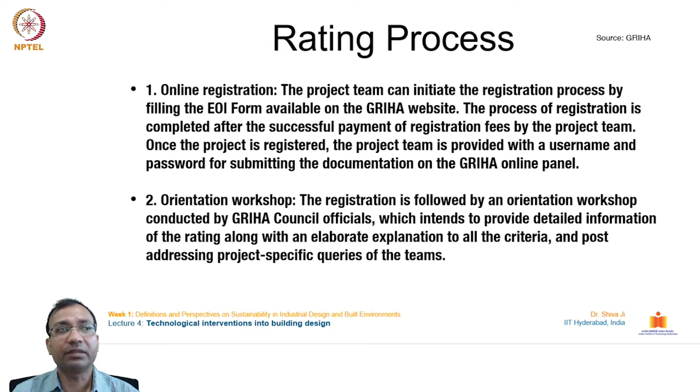After this, they carry out due diligence stage 1. The site visit shall be conducted by GRIHA Council officials to validate sustainable measures adopted during the construction phase. It is scheduled after the project has reached its plinth level. The due diligence report should be uploaded on the panel within 20 working days from the site visit, followed by an uploading of a compliance report by the project team within the next 15 working days. This is to ensure that the project abides by the mandatory requirements of the rating.

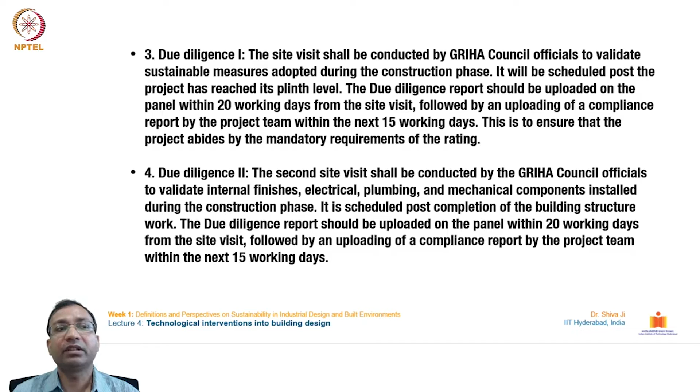Next comes due diligence 2. The second visit shall be conducted by GRIHA Council officials to validate internal finishes, electrical, plumbing, and mechanical components installed during the construction phase. It is scheduled after completion of the building structure work. The due diligence report should be uploaded on the panel within 20 working days from the site visit, followed by an uploading of a compliance report by the project team within the next 15 working days.

Further comes submission of documents. As the project nears completion, the project proponent will upload the documents for all criteria on the online panel using the username and password provided at the time of registration.

Further comes preliminary evaluation. After the online submission of documents, the preliminary evaluation is carried out by a team of professionals from GRIHA Council and external evaluators who are experts in their respective fields recognized by GRIHA Council. The documentation must be complete in every aspect of all attempted criteria, along with the commissioning report. Any attempted criteria with incomplete documentation shall not be evaluated. Online calculators provided for specific criteria need to be filled and submitted.

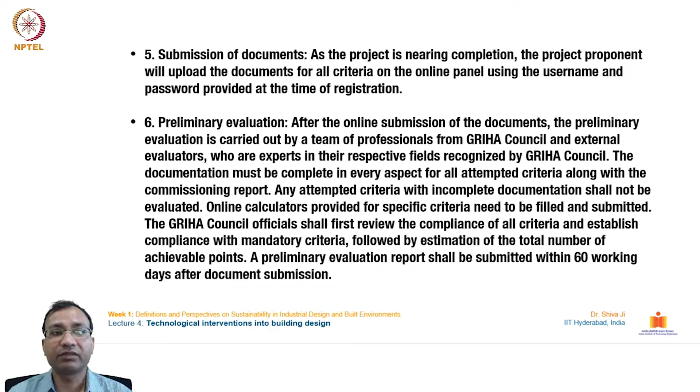The GRIHA Council officials shall first review the compliance of all criteria and establish compliance with mandatory criteria, followed by estimation of the total number of achievable points. A preliminary evaluation report shall be submitted within 60 working days after document submission.

Further comes final due diligence. The final site visit shall be conducted by GRIHA Council officials to verify the submitted documentation with on-site implementation. The visit is done once the project is complete and all equipment and systems are installed and commissioned. The due diligence report shall be uploaded on the panel within 20 working days from the site visit.

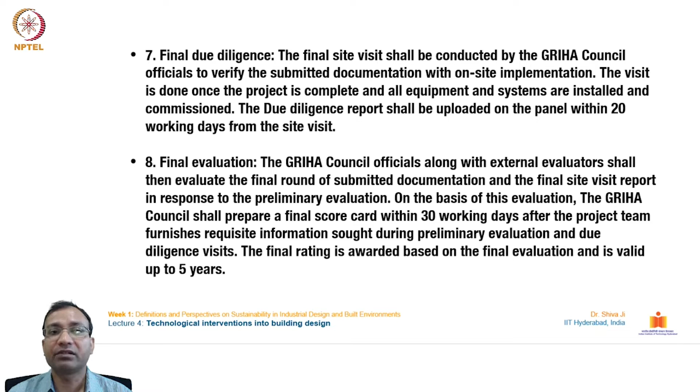The final evaluation comes last. The GRIHA Council officials, along with external evaluators, shall then evaluate the final round of submitted documentation and the final site visit report in response to the preliminary evaluation. On the basis of this evaluation, the GRIHA Council shall prepare a final scorecard within 30 working days after the project team furnishes requisite information sought during preliminary evaluation and due diligence visits. The final rating is awarded based on the final evaluation and is valid up to 5 years.

Further comes additional due diligence - green awareness drive. The GRIHA Council conducts an additional due diligence visit after the final rating for green awareness and education among project occupants. This visit aims to impart basic knowledge and understanding on green buildings and their way of working. This awareness program could be organized within 12 months of occupancy of the project.

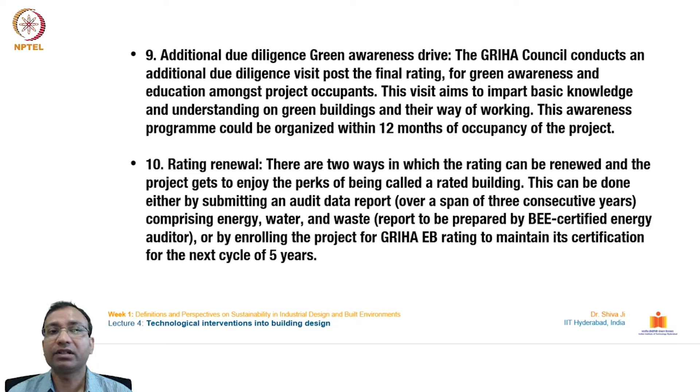Then comes rating renewal. There are two ways in which the rating can be renewed, and the project gets to enjoy the perks of being called a rated building. This can be done either by submitting an audit data report over a span of 3 consecutive years, comprising energy, water, and waste reports prepared by a BEE-certified energy auditor, or by enrolling the project for GRIHA EB rating to maintain its certification for the next cycle of 5 years.

So we currently have the green rating structure of GRIHA version 2019. The overall sequence of criteria and their appraisals have been changed in GRIHA version 2019 from the previous editions.

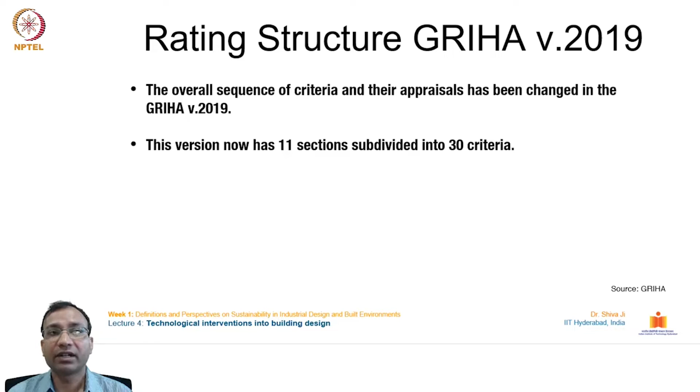This version now has 11 sections subdivided into 30 criteria. We will see them one by one. This is actually the entire criteria set of GRIHA present structure version 2019, including this page.

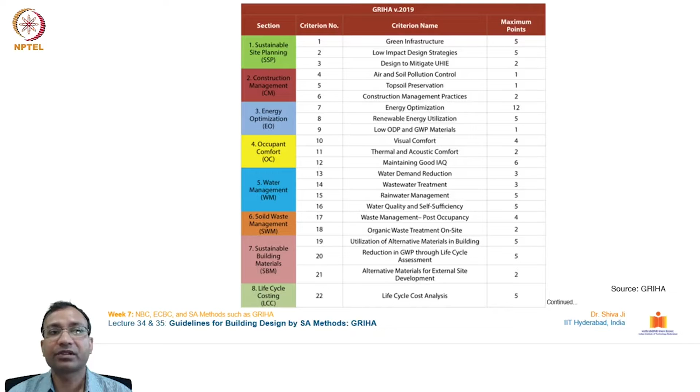It has sections, then criteria numbers, then criteria name, and then the maximum points allocated to that particular criteria. It starts from sustainable site planning, then construction management, then energy optimization, then occupant comfort, water management, solid waste management, sustainable building materials, life cycle costing, socio-economic strategies, and finally performance metering and monitoring.

Further, there is one more point of innovation added to this entire criteria set, and as a total it has 105 points in totality, including 5 dedicated only for innovations.

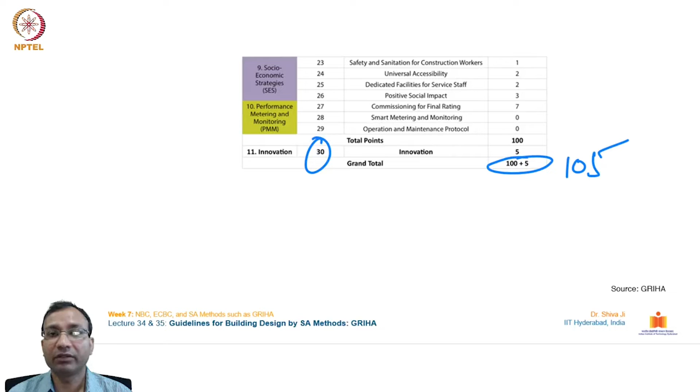So we will see the GRIHA version 2019 and its structure. Starting from this green circle, sustainable site planning has a 12% share given to this section.

Then construction management has received a 4% share. Then energy optimization has received an 18% share. This is the largest share held by the energy optimization section, which clearly shows how important it is to conserve and preserve energy.

Then the rest gets attention. The next is occupant comfort, which has a 12% share. Then water management has 16%, making it the second highest share receiving section, showing the criticality of saving water.

Then we have solid waste management with a 6% share, and 12% for sustainable building materials. So there are three sections with a 12% share, and this sustainable building material section comes at the third level in terms of percentage share. Then it goes to life cycle costing with 5%.

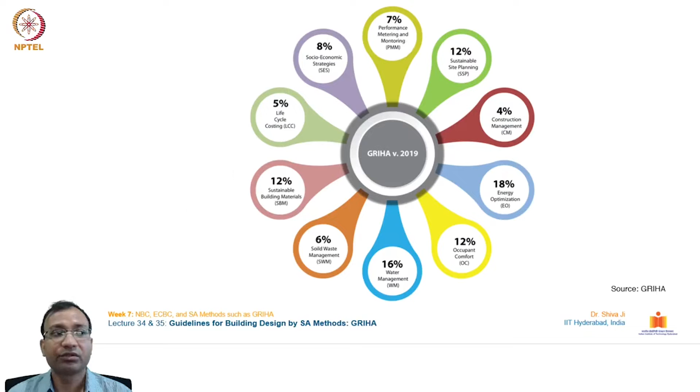Then it comes to socio-economic strategies with an 8% share, and finally performance metering and monitoring with a 7% share. We will see the breakup in the coming slides.

The percentile of awarding a star varies with the point threshold. A project which receives points within a range of 25 to 40 is rated as a single star GRIHA rating. Projects falling short of 25% may not be given any star rating. Then in the next slab, the point range between 41 to 55 receives a 2-star rating.

Then 56 to 70 is 3-star, 71 to 85 is 4-star, and 86 points and above receives a GRIHA 5-star rating, which is the highest rating currently available from GRIHA.

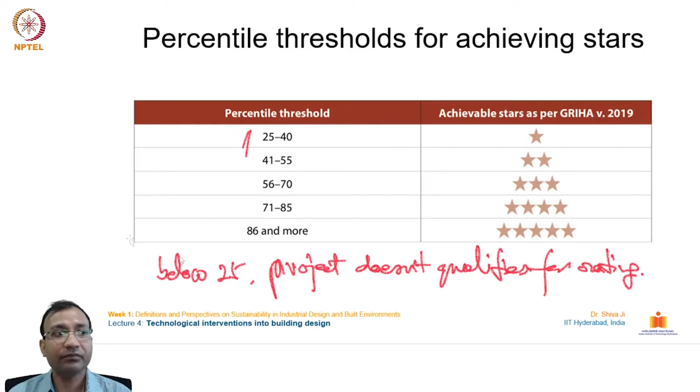Features of version 2019 GRIHA. Let's see, there are some mandatory appraisals. A project must comply with these mandatory parameters to be considered for GRIHA rating. This is very important for the project to have these criteria fulfilled and satisfied to the fullest. In GRIHA version 2019, no points are awarded to mandatory appraisals.

However, if the project fails to comply with any of them, the rating will be denied. These mandatory points do not carry any points, but they are mandatory in nature, and a project must comply with these criteria sets. Only after successfully meeting the criteria of these mandatory appraisals can the project be rated. The rest of the criteria, which are optional, have found place in the rating structure seen in the previous slides.

A non-linear point distribution system is one of the features of the present version of GRIHA. This concept of non-linear point distribution is applicable throughout this rating variant. This is done to recognize and award points based on increased efforts to meet the requirements given in the appraisals. For example, observe the point distribution for low impact design as mentioned in table 3. We will see it later.

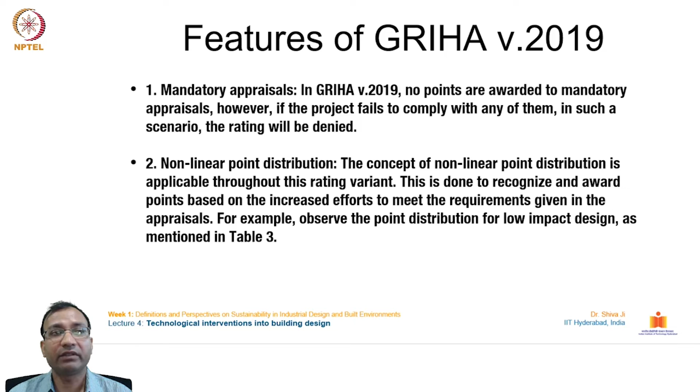Third is the addition of new criteria. The new criteria that have been added in the rating system are given below: green infrastructure is a new criteria added in this present version of GRIHA 2019, commissioning for final rating, reduction in CO2 emission of the building, alternative building materials for external site development, life cycle cost analysis, water quality and self-sufficiency, and finally positive social impact.

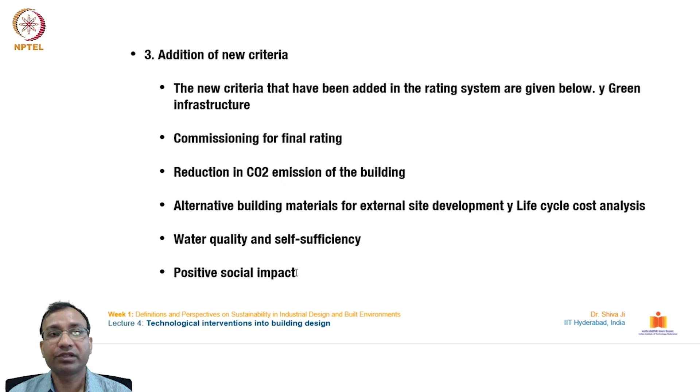So this is the classification of various buildings according to their typology. These are healthcare, hospitality, institutional, offices, residential, retail, and transit terminal types of buildings, under which there are some variations. These are the current building typologies which are rated with the help of GRIHA.

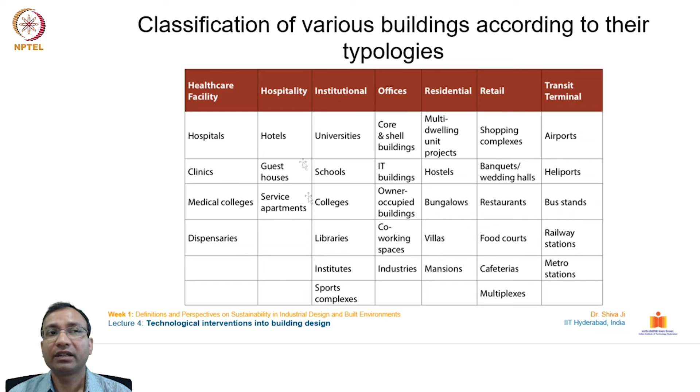In this healthcare facility, you can see hospitals, clinics, medical colleges, dispensaries fall under this typology. Hotels, guest houses, service apartments fall under hospitality typology. Universities, schools, colleges, libraries, institutes, sports complexes fall under institutional typology of the building, and similarly like these many.

So we will move further to check each and every section for the criteria sets, what they have and the kind of points which are given to them. Starting from the first one, which is the sustainable site planning section.

This has three criteria: green infrastructure, which carries 5 points, low impact design, and design to mitigate urban heat island effect, which receives 2 points. Together this section holds 12 points.

We can see it starts from site planning, which comes at the preliminary beginning of the design or any conceptualization. We must take into consideration the site situations, site location, natural features, and presence of elements on that particular site, and how the design can come up around those concerns. This is one of the major and preliminary sections and criteria sets where design and conceptualization begins to take shape.

This talks about establishing green infrastructure. Green infrastructure means energy harvesting units, energy conserving procedures and methodologies, plus following savings on the material and resources part.

Then it talks about using low impact designs. We have discussed in detail the impacts caused by this growth and development scenario in the present world, post-industrial period. So designs which cause lesser impact are the preferred ones in today's time, and they have found place here. This is one of the most important criteria as far as sustainability aspects on environmental concerns are concerned.

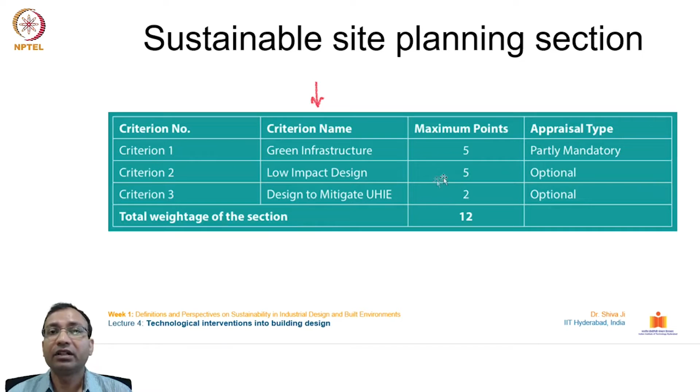So designs which try to mitigate or minimize this UHI effect, this point has also found place in this particular section.

If you see, the mandatory point in this particular section is to ensure that the site plan is in conformity with the development plan, master plan, or UDPFI guidelines. This should comply with provisions of eco-sensitive zone regulations, coastal zone regulations, heritage areas identified in the master plan or issued separately as specific guidelines, water body zones such as no construction permitted in the water spread or buffer belt of minimum 30 meters from the full tank level, various hazard prone area regulations, and others if the site falls under such area.

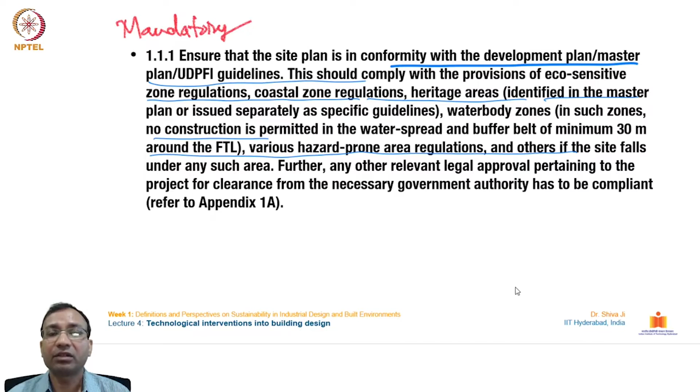Further, any other relevant legal approval pertaining to the project for clearance from the necessary government authority has to be complied with, for which there is an appendix also. The project must comply with the city planning, the master plan of that particular place, and it must comply with regulations if there are any eco-sensitive regulations, such as forest areas, coastal zone regulations, or heritage zone regulations, etc. Unless a project completely complies with these mandatory parameters, one cannot proceed for the GRIHA certification. Next comes the mandatory criteria here.

This talks about demonstrating that the project team implements tree preservation measures as per the alternatives mentioned below. Alternative 1: ensure that no existing mature tree on site is cut.

This is one of the very important and lovable points from the environmentalists, that we must preserve the mature trees on the ground at any cost. If a project has to come up at the location of that tree, there must be alternative arrangements to relocate that tree to some other location, but we must not cut any tree. This is one of the mandatory criteria under the framework of GRIHA.

Alternative 2: transplant existing mature trees if required within the site and ensure that they survive. Alternative 3: plant 3 trees for every 1 tree cut, of the same native or naturalized species. Alternative 4: adopt any combination of the previously mentioned alternatives.

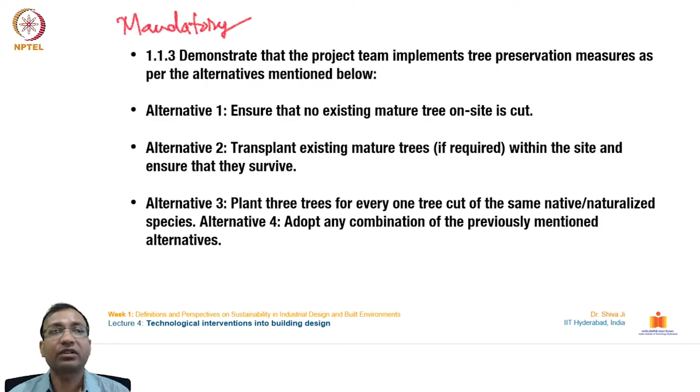So in a nutshell, preserving the trees and the existing flora from that particular site is a mandatory parameter.

Further, we are moving into the next section, that is the construction management section. Here, pollution gets importance. Air and soil pollution control, water pollution control, all sorts of pollution must be controlled, and for that there is an allocation of 1 point.

Then comes topsoil preservation. With construction activities, the topsoil gets degraded by falling debris, cement and other compounds, and even oil, grease, etc. This topsoil is very important for the growth of vegetation and other plants and trees, so we must protect it. This topsoil also houses several types of microbes and other organisms, so we must protect this topsoil.

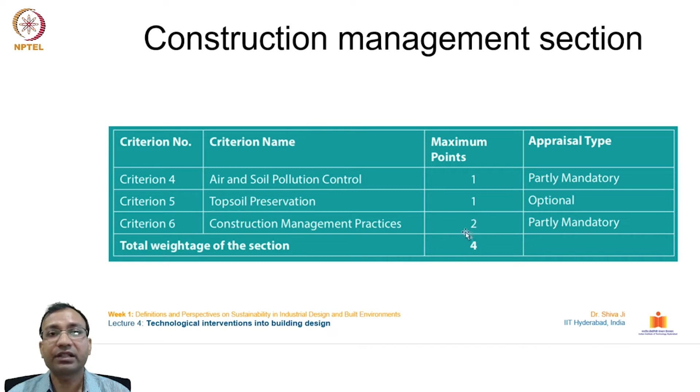Finally, there is a third point of construction management practices - responsible construction management practices which take care of the employees and manpower employed on the project. This receives 2 points. Overall, this section has got 4 points.

The mandatory points here are: adopt at least 6 measures to minimize air and soil pollution during construction; provide 3-meter high continuous barricading along the site boundary so that pollution or spillover like dust and debris should not go out of the project area; provide wheel washing facility and gravel bed at all vehicular entrance and exits of the site, so there are no footprints of soil and mud on external roads or arterial roads outside the project area; ensure diesel generator sets are in compliance with CPCB norms and have an exhaust with stack height of at least 2 meters from the top of the generator with a cap.

Implement a spill prevention plan for storage of diesel, admixtures, curing compounds, bitumen and other hazardous material. Ensure that fine aggregate, excavated earth, and other construction material with a tendency to get airborne are covered or sprinkled regularly with non-potable STP water - STP water is sewage treatment plant water. Next, ensure sprinkling of water on unpaved pathways on site with non-potable water to mitigate air pollution. Limit the speed of vehicular movement on site to 10 kmph.

Ensure that vehicles carrying waste material out of the site are covered. So all of these points talk about preventing pollution in one form or another, whether it is air pollution or soil pollution. These are mandatory points which a project must take care of while under construction.

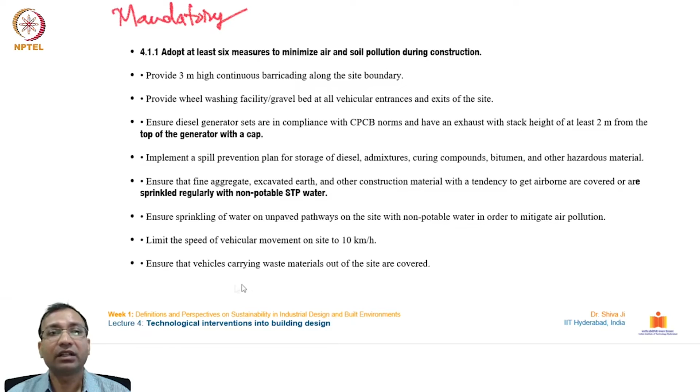Next, there are points such as adopt at least 2 strategies from the list given below to minimize water consumption during construction: use of gunny bags, ponding techniques or curing compound; meter and monitor the consumption of water during construction; use water reducing admixture in concrete mix; use of treated wastewater and/or captured storm water.

These water related points are also mandatory points in this construction management section. So we can see clearly it talks about minimizing the consumption of water, starting from the concept which we have discussed in the previous lectures, and then conserving the water.

So the water should not get evaporated so quickly, so the use of gunny bags and other ponding techniques and curing compounds should also be used on the site for reducing wastage of water. So these are the points related to water conservation on the site.

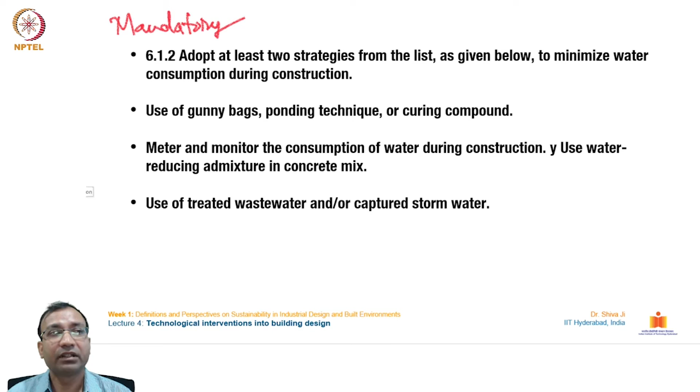Further, if we see the energy optimization section, there are three criteria points: energy optimization, renewable energy utilization, and low ODP and GWP material. These points have found a lot of weightage here. Energy optimization in itself is a single criteria with 12 points allocated only for this criteria, so we can understand the intensity and criticality of energy optimization in recent times.

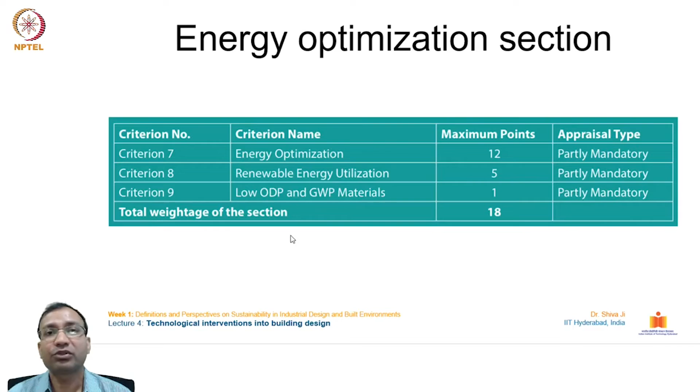And the kind of weightage it has received in this GRIHA framework. Further, renewable energy utilization is awarded 5 points, and ozone depleting potential materials and greenhouse gas, global warming potential materials and compounds should also be discouraged, and even if they have to be used, they must be in a very low quantity. So this has also found a place here, and with a total of 18 maximum points, this criteria is one of the topmost criteria with the highest weightage.

The mandatory points here are: ensure that the project demonstrates compliance with the mandatory requirements of ECBC 2017 as per the appendix table given in the annexure. Ensure that the project meets the GRIHA benchmark of EPI 5 as per table 3.3. Ensure that the equipment installed within the project, whichever applicable as per the given table, is either BEE star labeled or of equivalent performance. So this standard star rating system is there, and the equipment must comply to this star rating system, as per table 3.5, list of BEE star labeled equipment.

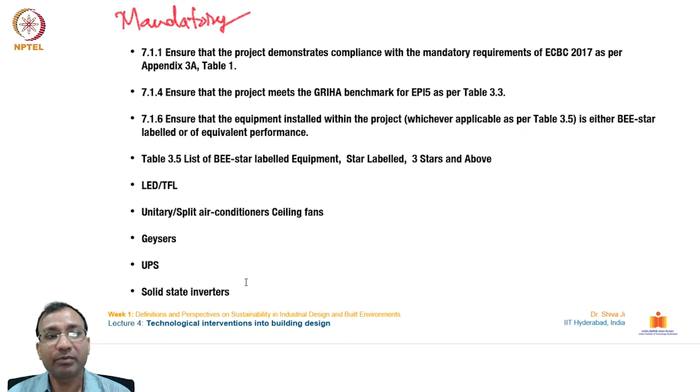These are LED and TFL based equipment, unitary and split air conditioners, ceiling fans, geysers, UPS. These are the list of equipment which must comply to the BEE star rating system. Further, ensure installation of on-site and off-site renewable energy systems to offset part of the annual energy consumption of internal artificial lighting, HVAC, and domestic hot water systems as mentioned in the table. Demonstrate that 100% of the annual energy consumption of these systems is offset through off-site renewable energy systems. So these are the mandatory points.

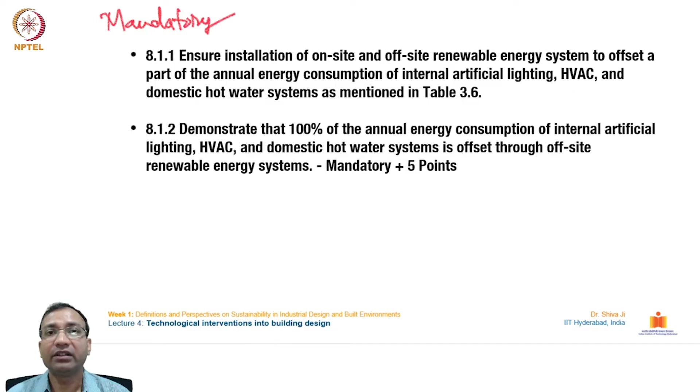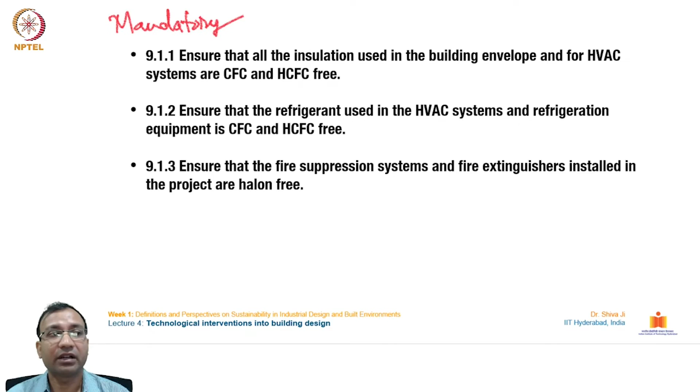So there is hardcore promotion of renewable energy resources. Further, ensure that all the insulation used in the building envelope and for HVAC systems is CFC and HCFC free. We have discussed in a previous lecture the importance of insulation and sealing in buildings to conserve energy. Ensure that the refrigerant used in HVAC systems and refrigeration equipment is CFC and HCFC free. Ensure that the fire suppression systems and fire extinguishers installed in the project are halon free. So there is a very critical focus on the protection of the ozone layer by using non-CFC products and articles.

In the next section, this belongs to the occupant comfort section, which has three criteria sets: visual comfort, thermal and acoustic comfort, and indoor air quality. These are the most basic comfort conditions desirable for human use, to be undertaken for any occupied atmosphere. So these have found a place.

Visual comfort, you may be surprised to see, even having a look of beautiful views outside, whether it's a green area, an activity area, a marketplace, or any such place where one can see greenery or the movement of other human beings or other life forms, is considered one of the important comforting points for humanity, keeping in mind the psychological effects that can happen if a person is locked inside a closed room with no opening or no visual connection to the outside world. So this has found a place apart from the regular thermal, acoustic, and indoor air quality considerations.

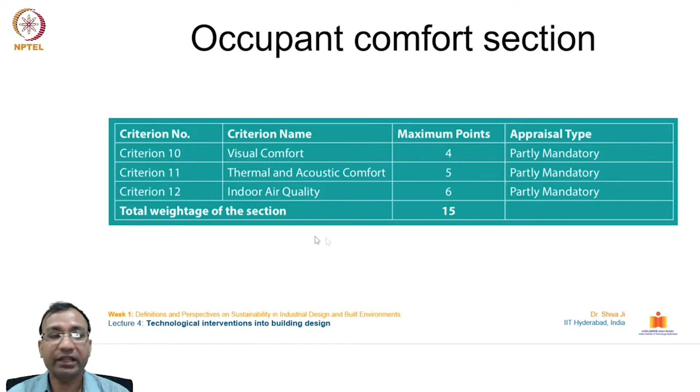In this section, ensure that the window to wall ratio does not exceed 60%, and the vertical fenestration complies with a minimum VLT of 0.27.

So you can see how much emphasis is given on the illuminance level inside the spaces. Depending upon the utility and activity in particular areas, this illuminance should vary from 100 to 2000 lux. Further, demonstrate through simulation that the project meets mean DA requirement of more than 300 lux.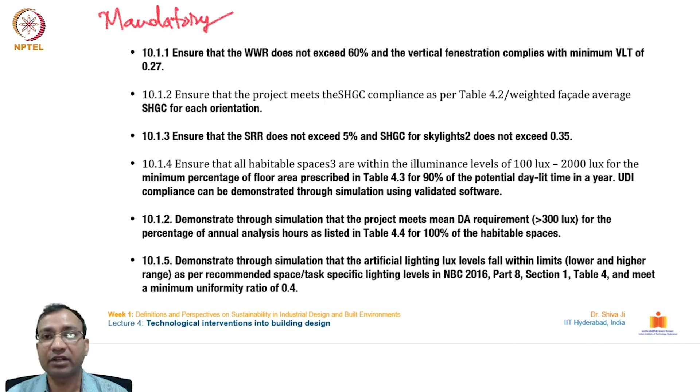So these are the mandatory points as far as lighting levels and lighting comfort inside the spaces are concerned.

Demonstrate that the project meets the thermal comfort requirements of all regularly occupied spaces. Ensure that all interior wall and ceiling finishes such as primers, paints, putty, etc. have volatile organic compounds at a lower percentage content as per appendix 4C table 1, and are lead free.

Lead is one of the most toxic substances which was conventionally used in construction material, but once it was discovered, it was completely banned from use in any materials used in the habitable spaces of buildings.

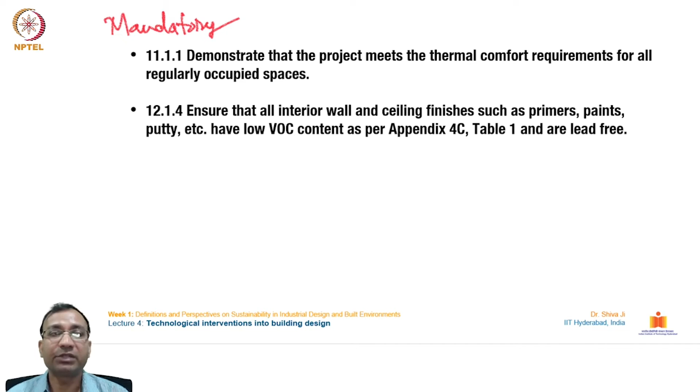Further, coming down to the next section of water management, there are 4 criteria sets: water demand reduction 4 points, wastewater treatment 2 points, rainwater management 5 points, water quality and self-sufficiency 5 points, with a total of 16 points.

The mandatory points are: demonstrate reduction in building water demand from the GRIHA base case. There is a base case given for several criteria sets, so a GRIHA rated project must comply at least at the level of that base case or even higher. Ensure that the project meets water quality norms as per CPCB rules and BIS as mentioned in the appendix.

This water management section talks about reducing the demand first, so that there is less consumption of water, and less amount of this resource is required in the building.

There are also treatment facilities considered, so that the used water or other forms of water can be reused on site for other non-potable activities and requirements.

Rainwater management: rain supplies fresh, pure water, unless it gets polluted while passing through the atmosphere through poisonous gases and other particulate matter. Otherwise rainwater is considered one of the safest for drinking and other utilization purposes.

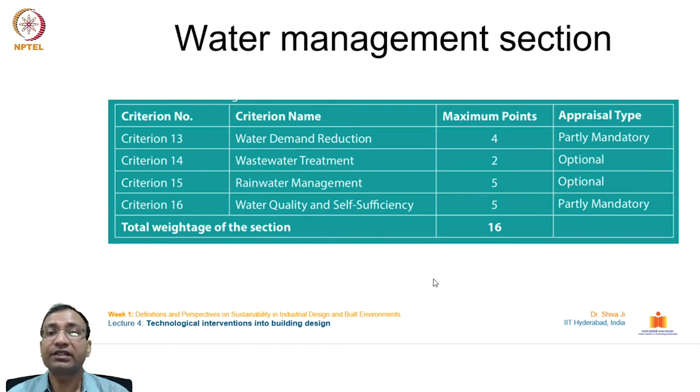Water quality and self-sufficiency: maintaining water quality means maintaining hygiene and quality for human consumption, and self-sufficiency means the site itself has the self-sufficiency in meeting the requirement of water on site.

Further, after this section, we have the solid waste management section. Here we have 2 criteria sets, for example waste management post occupancy and organic waste treatment on site, which have respectively received 4 and 2 points.

This talks about post occupancy: there must be a waste management system on the site, whether related to segregation, sending it to a responsible agency or recycling unit for reuse, or further disposal. A responsible disposal system must be in place by having a waste management system on the site.

Organic waste treatment on site is important, because the organic waste from sources like kitchen waste and other organic matter created in the kitchen, and elsewhere from pruning of trees and plants, must not go outside the site and should be recycled on site itself.

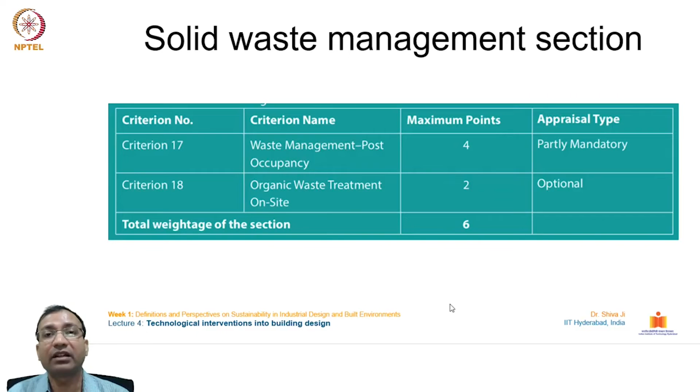Various forms, techniques, and usages are being promoted by several NGOs and other agencies to have on-site composting systems, on-site dissolving systems, and on-site disposal systems for organic waste, or it can be reused for other on-site purposes.

The mandatory criteria under this section is to demonstrate compliance with all government notified waste management rules. So it is very important for the project to comply with the waste management rules and guidelines from the local authorities.

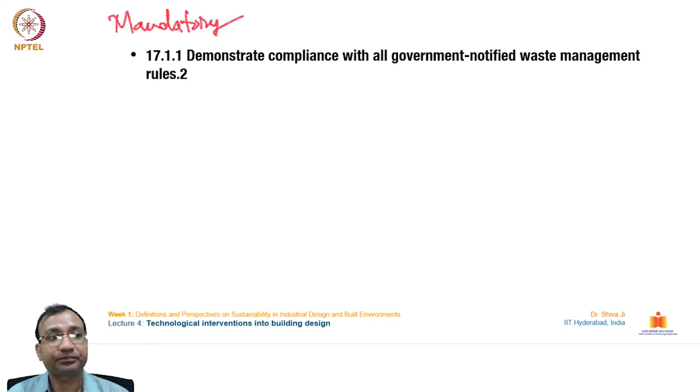Next in line with this new section, we have a sustainable building materials section. Here we have utilization of alternative materials in the building, reduction in global warming potential through life cycle assessment, the LCA method, the EIA method which we discussed previously - such high potential impact materials must be discouraged on site. And finally, alternative materials for external site development, so site development works can also be handled using alternate materials.

The first one has received 5 points, talking about the utilization of alternative materials in buildings. The idea is to use less impacting materials by going ahead with alternatives. For example, we studied in the previous lecture on sustainable materials that fly ash is one such material, a byproduct of a certain industry which the construction industry has adopted.

Fly ash comes from coal plants - it's a byproduct of coal-based industries and power generation units. A huge quantity of this fly ash gets accumulated. Earlier, fly ash was a very unproductive material, with no moisture content or organic content, so it was very bad if thrown into agricultural fields. It used to create a lot of problems there and would fly away from these sites through wind and air.

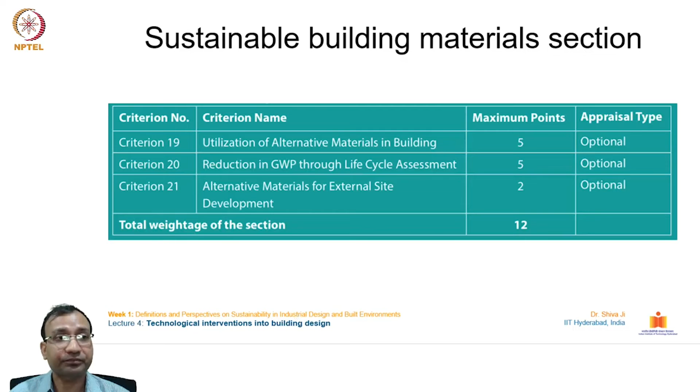Further to this, we have a life cycle costing section, which talks about the LCA analysis we studied in previous lectures. There is a lot of emphasis given on assessing the life cycle of any product or component used in the building industry. High impacting materials must be discouraged through this analytical tool. This tool is important to understand embodied energy and the overall impact a product can exert on the environment.

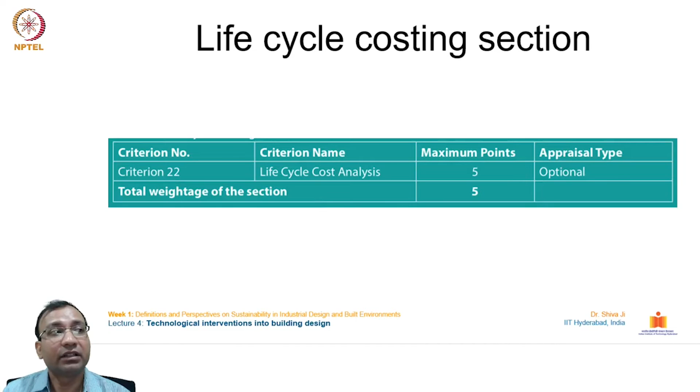Further, we have a socio-economic strategies section with 4 criteria points: safety and sanitation for construction workers, universal accessibility, dedicated facilities for service staff, and finally positive social impact. These criteria have received 1, 2, 2, and 4 points respectively.

I'll talk about the first one, safety and sanitation for construction workers. Traditionally, construction workers employed on sites were not taken care of - they used to live in very bad conditions, not provided with potable water, and sanitation facilities used to be non-existent on those sites. In recent years, we've seen development in taking care of the workforce on site, so that the men and women along with their kids who reside on site for construction activity must be taken care of.

Their basic necessities and other requirements must be fulfilled, such as water and sanitation activities. Universal accessibility talks about the inclusive growth and development model. It talks about taking care of especially abled persons of the society, who are having some kind of difficulty in their motion, vision, hearing, or any other sort.

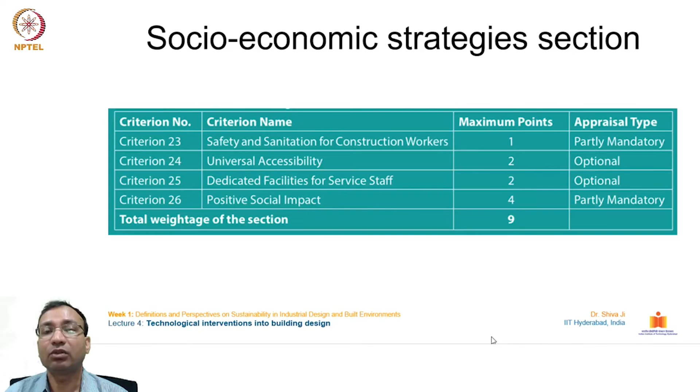In the mandatory points, if we see, there are a few points given: ensure compliance with the requirements of NBC, National Building Code 2016, for the following parts. Part 1, provision of necessary safety equipment and safety measures for the construction workers. Part 2, provision of clean drinking water, hygienic working and living conditions, and sanitation facilities for the workers. Part 3, provision of creche facility for the children of construction workers in case their families are allowed to work or live at the construction site.

So you can see these three points. These are very humane considerations. A very humane attitude is shown from these construction projects, because earlier most of these points were not taken care of, and our workforce used to receive not so healthy or supporting environments while working or staying on the site.

So basic necessities such as water, sanitation, living facility, and taking care facility for the children of the people who are employed and working on these sites. And finally, the safety of the workers who are working on the site. Safety comes first in any activity, whatever is going on the construction project.

So a project must comply with the safety standards and safety measures to take care of all of the workers, all of the workforce employed on the site. And there must be adequate arrangements so as not to have any accidents or casualties on any project.

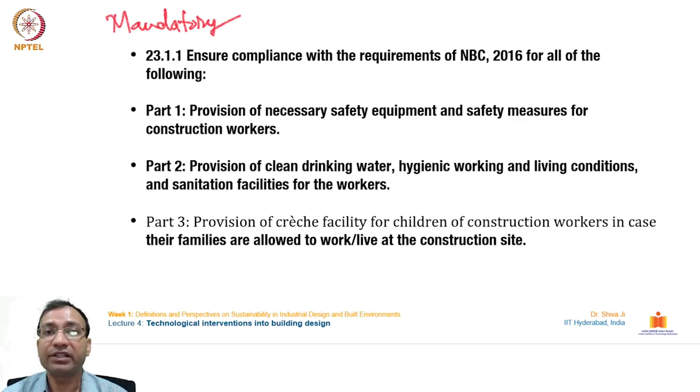Next to this, the mandatory points demonstrate that the project team implements tobacco smoke control measures in case of air conditioned and non-air conditioned buildings, as per the alternatives mentioned below. These are the mandatory measures. Alternative 1: ensure that tobacco smoking is completely prohibited within the site premises. Alternative 2: ensure that designated smoking zones or areas are provided and the smoke is managed within a controlled environment, in case of air conditioned buildings.

Additionally, there must be restriction to smoking in public spaces. Smoking in public places is already banned by the government of India, and now it is a public law that one cannot smoke in public spaces. So a construction site being a public space where there are n number of people working together, this smoking cannot be allowed in any form on the construction site. This must be taken care of.

Additionally, if there is any air conditioned space where there is a demarcated area, then a demarcated area can be constructed for smokers, clearly marked, where the exhaust system can work more efficiently to take out the exhaust or fumes of that smoke separately, without disturbing the other people at that location.

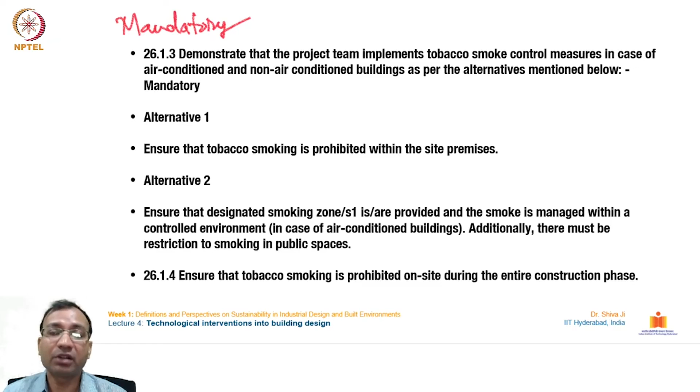Further to this, we have the next section on performance metering and monitoring. This section is dedicated mainly to the evaluation and performance monitoring of the building - how the building is faring over time, how much consumption it is doing for resources and energy particularly. This section takes care of such responsibility.

It has three dedicated points: commissioning for final rating, smart metering and monitoring, and operation and maintenance protocol. The first and third criteria are not given any points, but the middle point has 6 points. This talks about smart metering and monitoring, so that constant monitoring of resource consumption can be taken care of. In case of any fluctuation, if consumption is going very high, the leakage or that tentative area can be addressed and rectified in the given time.

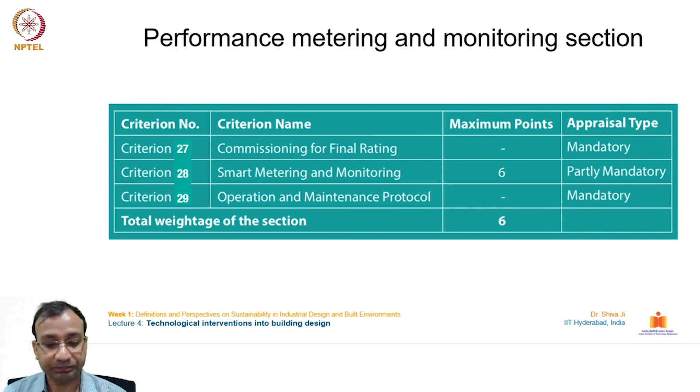This table talks about the points of ensuring that third party commissioning is conducted for the systems mentioned in the table - system types such as important building services like HVAC, lighting and electrical, water and waste. For the commissioning part: air side AHU, fan coil units, cassette units, and floor mounted units; and the water side like cooling towers, chillers, primary and secondary pumps and motors, boilers, service hot water, electric, gas or oil based boilers.

For the electrical and lighting sides: all circuits, sensors, occupancy or day lighting evaluations, also transformers, DG sets, LT panels, renewable energy systems. For the water system: domestic water pumps and motors, sewage treatment plants. For waste: organic waste, composters, vermicomposters, garbage chutes, and other mechanical waste disposal and treatment systems should be placed. These are the systems which must be monitored and evaluated regularly for the overall safe upkeep of the site.

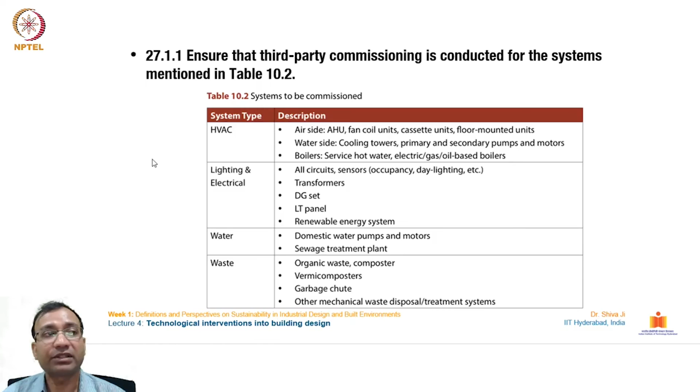The mandatory points here are to ensure that a commissioning plan is developed and implemented for the system as given in the table. Additionally, maintain a record of findings, logs and their rectifications during the entire period of construction, installation, and functional testing of systems. Further, demonstrate compliance with the source metering requirements as mentioned in the table.

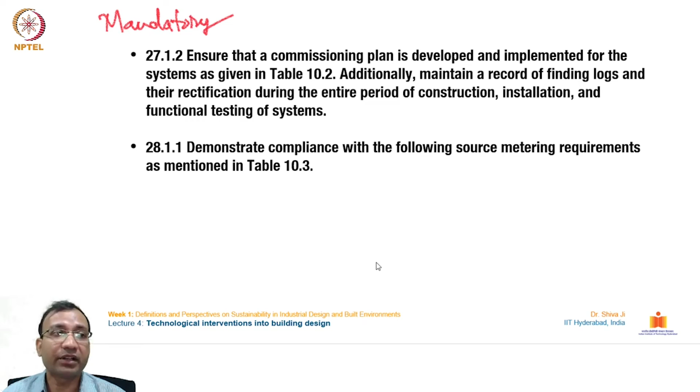Further to this, there are some more mandatory points. Ensure that a core facility or service group is formed which will be responsible for operations and management of the building systems and equipment post installation. So there must be a team on site, present all the time, to check and measure these systems.

Ensure the inclusion of a specific clause in the contract document of the systems supplier for providing training to the core facility or service group responsible for the operation and maintenance of the building system. So the supplier or manufacturer of that particular equipment, for example HVAC, must give training to the maintenance team present on site for the better upkeep of the equipment.

Further to this, ensure the development of operation and management protocol in the form of manuals, CDs, multimedia, information brochures, enlisting the best practices of O&M of the building systems. So information dissemination is also important. This kind of knowledge resource should be prepared for dissemination and easy referencing for the team deputed on site.

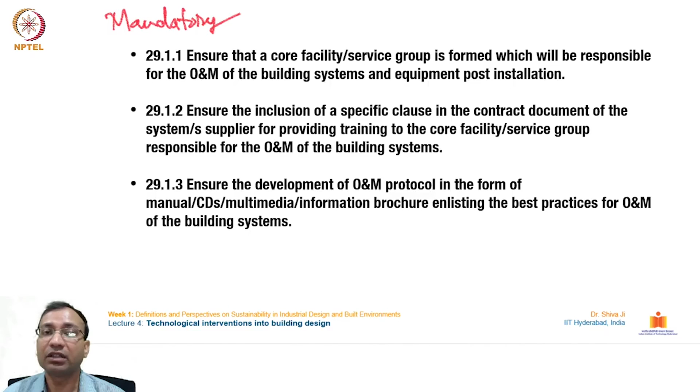Finally, we have this innovation section. This innovation section has received 5 criteria points, which means it is an important criteria set here.

Innovation can happen in any segment, any life cycle stage, any process or technique or technology or material, or approach. Innovation is barrier free, which is why there is no particularly finer criteria given for this criteria set. Rather it is open for experimentation from the designer, architect, engineers, manufacturers, construction management team, or even the owner or builder of that particular project, or even the occupants. So anybody, any stakeholder of a project, can go for adopting any innovative measures, and that is why this criteria is given to promote the idea of innovation to be implemented on construction sites, construction projects, and building designs.

That is why it is important for us to pay attention to the innovative ideas, creative ideas, which can be applied on a design project. So sustainability being a major concern in recent times, it has become very critical, very important to be addressed.

So in what ways can we deal with the overall objective of such rating systems with innovative ideas, innovative technology adaptations of materials, or alternative methods or mechanisms to come up with energy saving or material saving ways. This criteria is dedicated for serving all of those innovative ideas and approaches which are adopted on a particular site, so we must give some attention to this criteria as well.

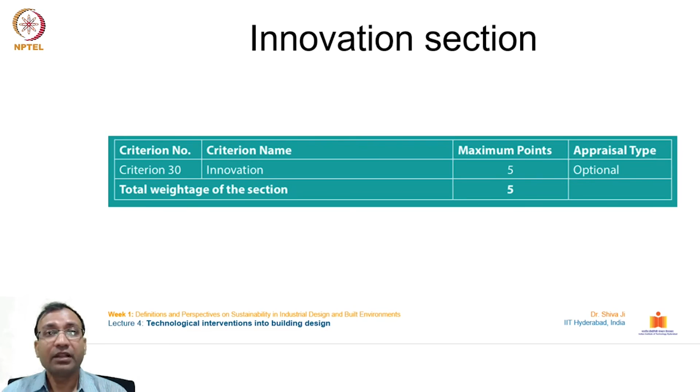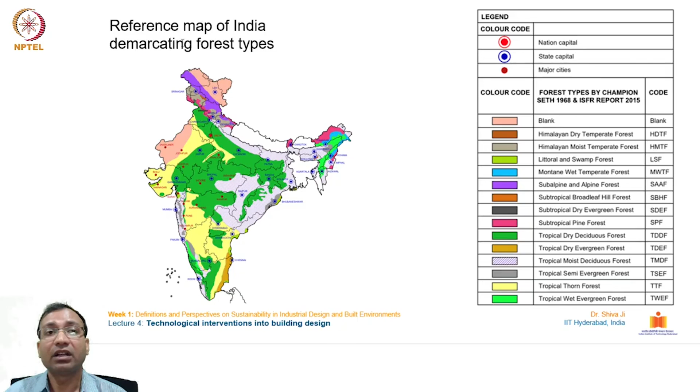So that is why I kept these maps also here in this discussion, in this lecture, for our understanding. Further, with this we are coming to the end of this lecture.

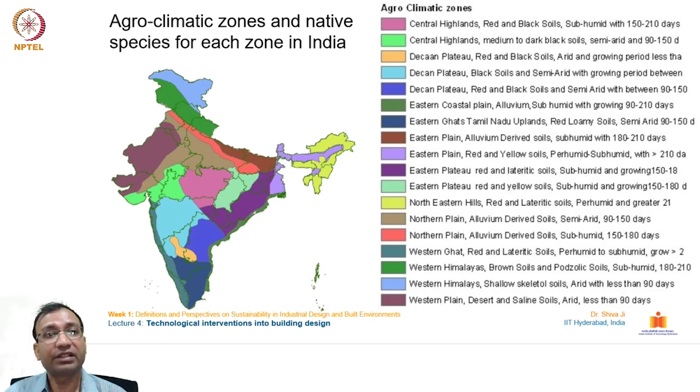You can always go to the GRIHA website. They have kept all of their GRIHA rating manuals and other supportive documents for download, for referencing, free of cost. So you can see what kind of additions they have in GRIHA, the kind of literature and reading material they provide along with these rating specification tools.

Apart from the basic GRIHA, they have several other types of GRIHA. There is this SWAGRIHA, meant for smaller projects, for example a smaller residential house, where an owner can himself or herself do some evaluation locally. They do not require GRIHA certified assessors and assessment team. So this is a very simple and very comprehensive approach. One can assess a smaller project on their own.

This is to promote self awareness, a kind of self initiative which we as an individual can take without taking technical help. If our project is not big enough, we can still manage.

Why is this important? Because if we count the number of projects from across India, the institutional or industrial or recreational or hospitality or hospital buildings are still far lesser compared to residential buildings. Almost every household, even if they own one single house, just imagine the number of houses we have in our country, beginning from independent site based houses to flats, to row houses, to houses in remote locations, houses of vernacular types. So all sorts of houses.